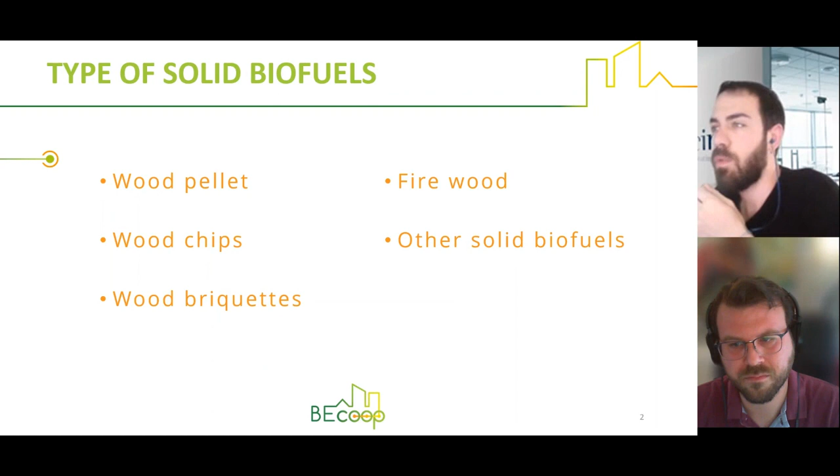So we're going to speak about the most common biofuels, mainly based on wood: wood pellets, chips, briquettes, firewood or logs, and finally we will give some information about other solid biofuels.

First, we have wood pellets, which are the most elaborated biofuel. These are small cylinders from 6 to 8 millimeters in diameter and 10 to 40 millimeters in length, obtained by pressing wood sawdust. Thanks to lignin, a natural component of wood that acts as a glue in forming the pellet, it is possible to form these small cylinders without using any other additives.

The main advantages of wood pellets are shown here. They have a high calorific value because they are compressed wood, they are homogeneous with a constant composition, which allows very high energy yields. They have minimum ash content, which reduces operation and maintenance needs of stoves and boilers.

They have easy supply in bags or in bulk, and competitive prices, especially compared with fossil fuels. We can also find quality guarantees since 85% of manufactured pellets have certifications such as ENPlus, DINPlus, or the ISO 17225-2 standard.

It is also a biofuel with a lot of presence in Europe, and the equipment that uses it is numerous, very varied, and cheap. Its main disadvantage is that compared to other biofuels, like wood chips or nutshells, the price of pellets is a bit higher. In 2018, the price of pellets supplied to houses by tank truck was 240 euros per ton.

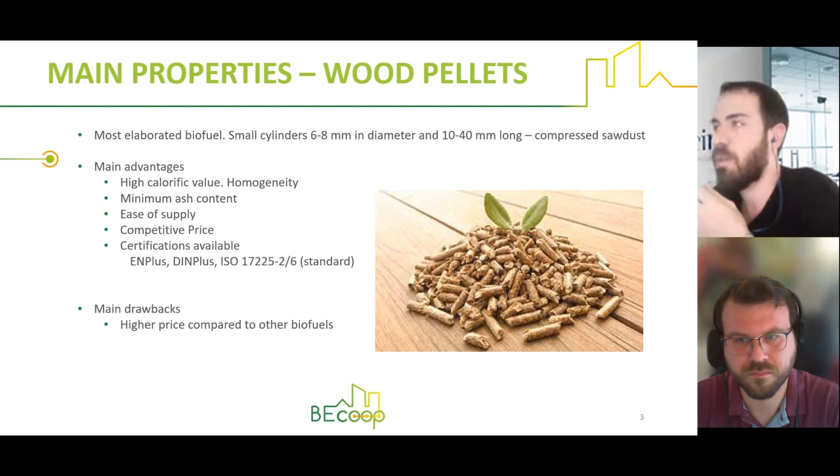Moving on, we are going to see wood chips. These are a product resulting from the crushing of biomass of woody origin, coming mainly from wood industries such as sawmills, carpentry, forest cleaning, or prunings. They have a variable size depending on the degree of crushing, and simple processing through drying and classification increases their energetic value.

Their main advantage is that compared to other fuels, they are the cheapest in terms of energy, especially compared to other woody biofuels. In 2018, the average price of chips for domestic use was about 108 euros per ton, so less than half the price of pellets.

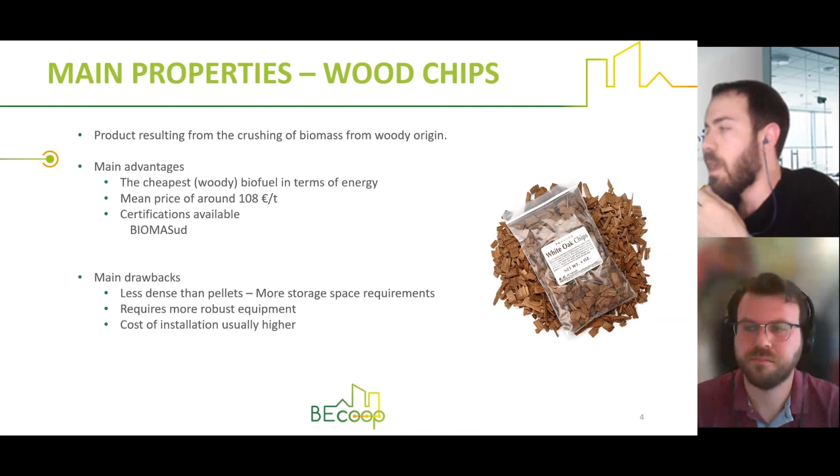Currently, the main supply companies offer chips with a certificate called Biomasud, which also guarantees standardization. But they have some disadvantages too: compared to other biofuels, they are less dense than pellets, so they require more storage space. They also require more robust equipment because they usually have higher ash content, and the cost of installation is usually higher.

Then we have biomass briquettes, a type of solid fuel made by compacting biomass materials such as crop residues, agricultural waste, forestry residues, or agro-industrial residues. They are compressed into a dense, high-energy, and easily ignitable fuel source. The biomass materials are typically first dried and then mechanically compressed under high pressure without using any binding agents or chemicals.

So in essence, they are more or less the same as pellets but with bigger dimensions, having cylindrical or rectangular shapes. They can be used as a renewable and sustainable alternative to traditional fossil fuels, for example substituting coal or other types of wood. Their main advantages are good thermal calorific value and being easy to store, handle, and transport, properties shared with pellets. They also have consistent combustion and ignition temperatures, and since they have been dried, they have lower moisture, which implies high burning efficiency.

They also don't generate smoke, soot, or carbon deposits as they are free from ashes. The main drawback is that the densification process is energy demanding, but less than pelletization. They have a higher cost than other biofuels, and they require large and waterproof space requirements. They are also affected by atmospheric conditions, for example, humidity.

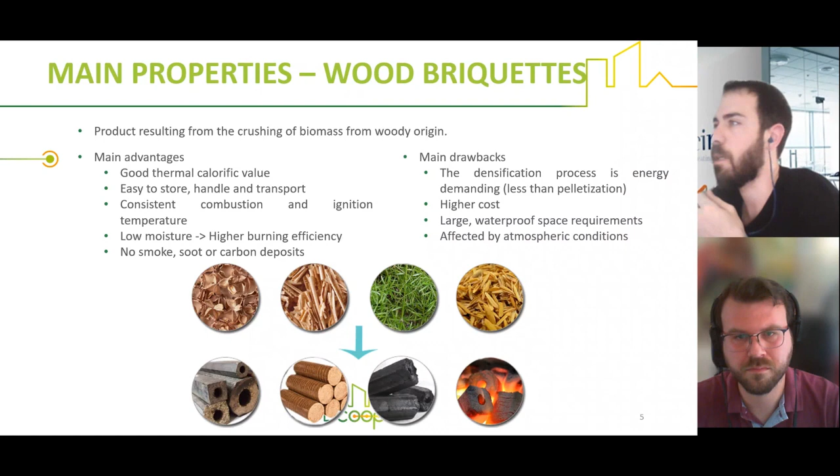In the case of firewood, this refers to logs or pieces of wood that are typically used for burning in fireplaces, wood stoves, or outdoor fires, which are the most typical source of biofuels that we can find. Most of us will have seen them in a lot of places. They are usually cut from trees, in their most natural state without any additional processing or shaping. So they are the least developed and controlled biofuel.

Although its use is in decline, the high number of chimneys in independent homes that are not very efficient means that these traditional biofuels continue to be widely used. Their main advantage is that they're widely available, because firewood is available in many regions, making it easily accessible for use as a biofuel. It's also cost effective because it can often be less expensive than other forms of biomass like pellets or briquettes, making them a good option for heating and cooking.

But the drawback is that it can also present a huge price variability. And they don't have very high processing requirements, because they require minimal processing compared to other types of solid biofuels.

Compared with other biofuels, it has some drawbacks. For example, they are not so homogeneous, and thus this does not allow automatic combustion and generates greater emission of particles and ashes. They have higher emissions because of this higher quantity of ashes. They also have greater complications of storage, and lower energy density compared to pellets and briquettes because they have not been densified. They have high price variability, as I've said before, and high difficulty in the automation of combustion systems.

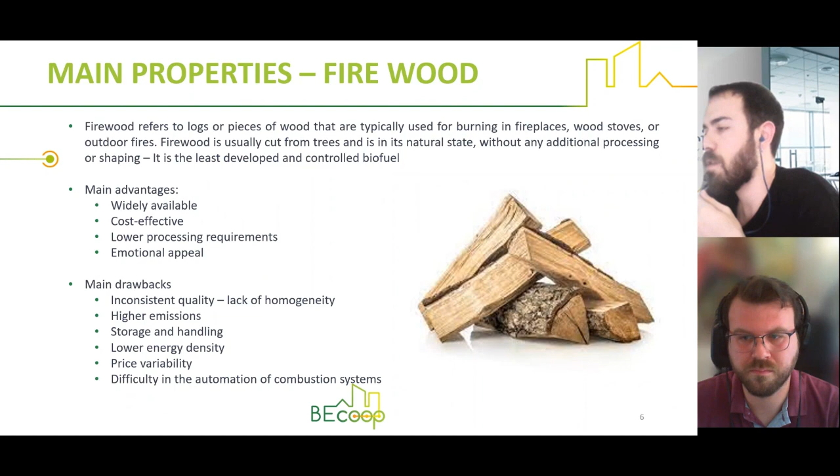Finally, we're going to see some other solid biofuels that are not as common as these forest residues. For example, we can find some agricultural residues such as straw, corn stover, rice husks, or sugarcane bagasse, that are typically lightweight and have low energy density compared to wood. They may require additional processing, such as grinding or densification, to convert them into briquettes or pellets in some cases, and they may also have higher ash content and lower calorific value compared to wood.

In the case of olive stones, they are typically dense and hard with low moisture content, and they have moderate to high energy density and also low ash content. They can be processed into briquettes or pellets with high calorific values, but their most typical exploitation form is in their natural way. Only in some cases are they dried.

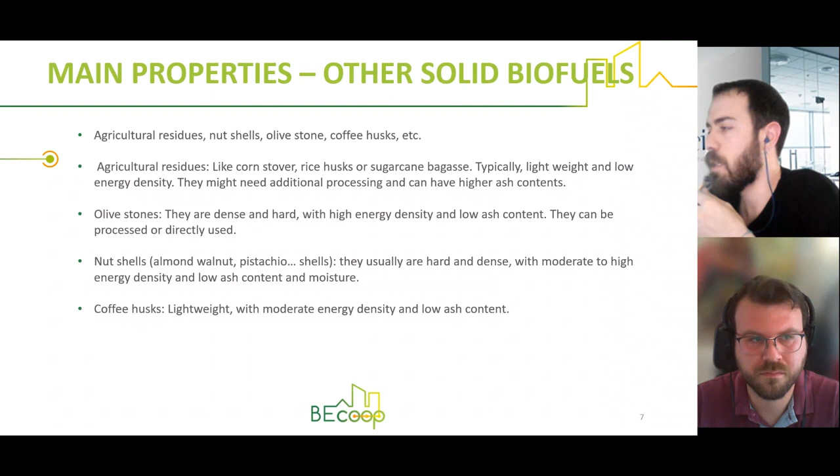We can also find nutshells that are typically also hard and dense with high energy density and low ash content. And finally, we can find coffee husks, which are typically also lightweight and available as byproducts of coffee production, which, as coffee production is so extended, makes a very big advantage for the availability of this biomass.

So this is all from my side. Thank you very much, and I hope that has been interesting. And of course, I remain at your disposal if you should have any doubt or question on whatever.

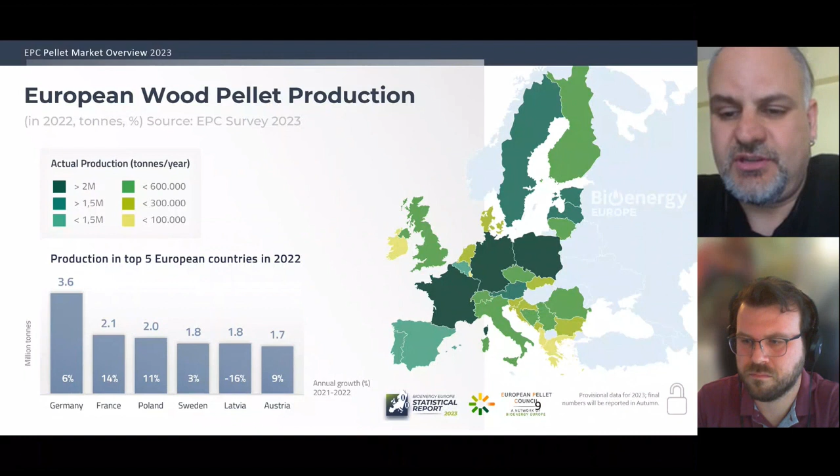But if you look at the map in more detail, you will see that pellet production basically takes place in most of the European countries, and pellet production in Europe is very much closely related to the wood processing industry, because primarily European pellet mills are using sawmilling and other wood processing residues for pellet production. So long story short, you can find a pellet producer most likely very close to where you're living in Europe.

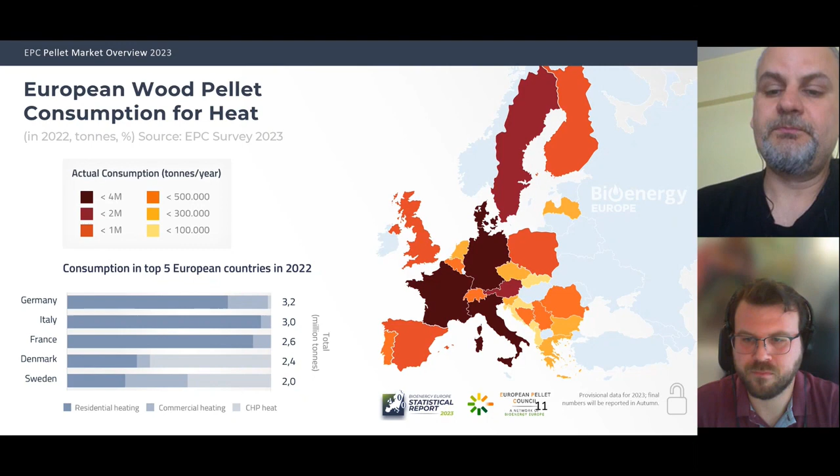But I mentioned several times the residential sector, and I imagine that several people in this webinar with us are representing energy communities, or aspiring energy communities, might be a better term. And most likely, these people will likely cater, if they establish a pellet activity, like ASEC did in the past, to the residential markets or small-scale commercial markets.

And therefore, in those market segments, consumption is very much related to the level of pellet appliances. You need a pellet appliance, either a stove or a boiler, to use pellets. Stoves are obviously used for room heating. They are more small scale and used in narrower spaces.

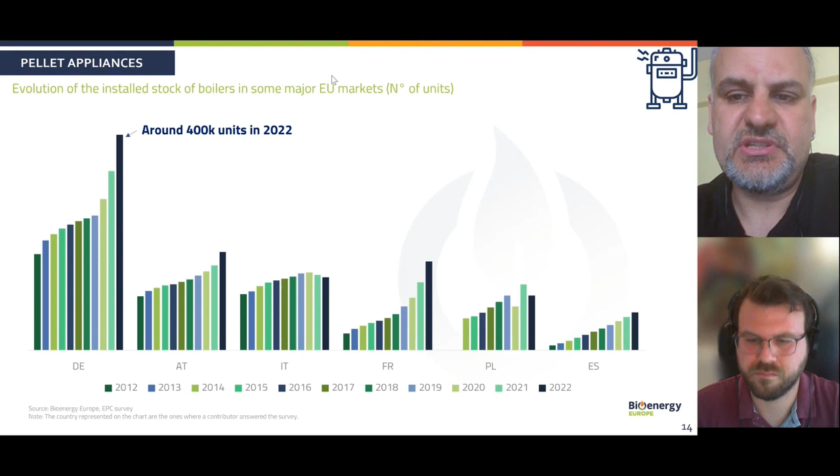Usually this is also driven by government incentives, programs that have allowed households or other end users to substitute their fossil fuel boilers with a pellet appliance. Obviously this is a big stimulus for the development of the residential pellet market in Europe.

But in the last two years, we've had an energy crisis, which has also been reflected in the pellet markets.

It took the war in Ukraine and a conflict that escalated into a wider financial and energy crisis to turn the tables. Since last year, from spring, with a peak in summer and early autumn months, we've seen unprecedented levels of pellet prices in Europe, in almost all member states. Since the peak, prices have started to go down, but they still remain at higher levels than historical values, and we're often asked why this is so.

There is not one simple answer. There are multiple reasons. One is that in the past, Russia was - and still is, I guess - a big pellet producer, mostly an exporting country. With the EU sanctions, imports of Russian pellets into Europe were no longer feasible, so there were some supply deficits last year.

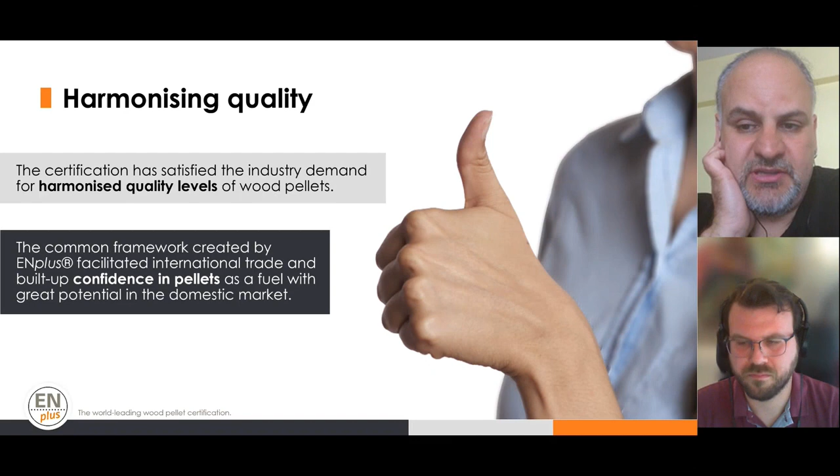So what does EN Plus try to do? It tries to harmonize essentially the quality levels of wood pellets. It's a fuel quality certification scheme, and the aim of such a scheme is to build up confidence in pellets as a fuel. Basically, at the end of the day, consumers should know that when they buy EN Plus pellets, they buy a product of specific quality parameters that they can use in their appliances without issues.

EN Plus is a third-party certification scheme, and maybe a short clarification here: a standard and a certification scheme are not the same thing. A standard is a document that provides some guidelines. A certification scheme, especially a third-party one, is a system that uses the standards but applies procedures to ensure they are followed by people in the value chain.

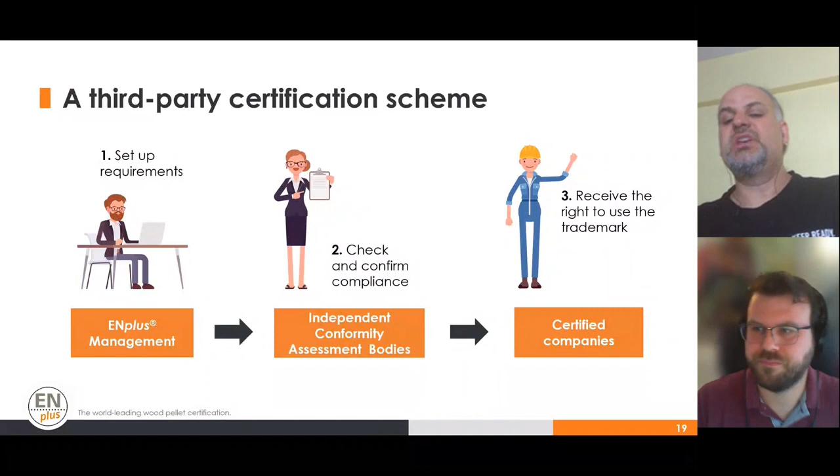So how does it work in practice? We have the management of the system, the central office of EN Plus, the European Pellet Council, that sets up the requirements for the system. Then we have independent conformity assessment bodies, as we call them, that visit the people involved in the wood pellet value chain and check that they comply with the requirements. Then you have the certified companies that, if they pass the tests and audits of the conformity assessment bodies, are allowed to use the EN Plus trademark.

EN Plus is a system that covers the entire supply chain, so you can have producers of wood pellets certified with EN Plus, traders of wood pellets certified, but also service providers. In some market segments this may be a more familiar picture; in others, like Greece, it might not be. A service provider could be, for example, someone delivering bulk pellets, EN Plus certified, to an end consumer via truck. In Greece and other markets it's mostly bagged pellets, so this may not be so familiar.

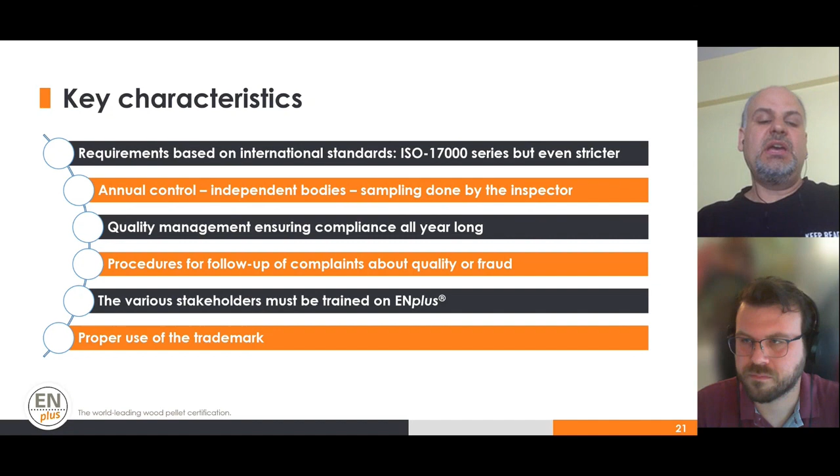Some key characteristics of the system: it's based on ISO standards, but some requirements are even stricter. There is an annual control of certified companies by independent bodies, including sampling done by inspectors. There is a quality management system that companies should use throughout the year to ensure compliance. There are procedures to handle complaints about quality or fraud cases, people illegally and improperly using the EN Plus trademark. People involved in any part of the certification scheme, like producers, quality managers, and the conformity bodies, need to be trained. And there are requirements about the proper use of the trademark.

I don't know if I need to go into a lot of detail about the history, but the scheme has already several years of operation. It was established in Germany in 2010. Now it's managed by the European Pellet Council, with local management in some countries by what we call national licensors. In other countries we have national promoting associations who are only active in promoting the scheme, while the management is done by the central office in Brussels. The conformity assessment bodies are people active in certification, inspection, or testing of pellet samples, for example.

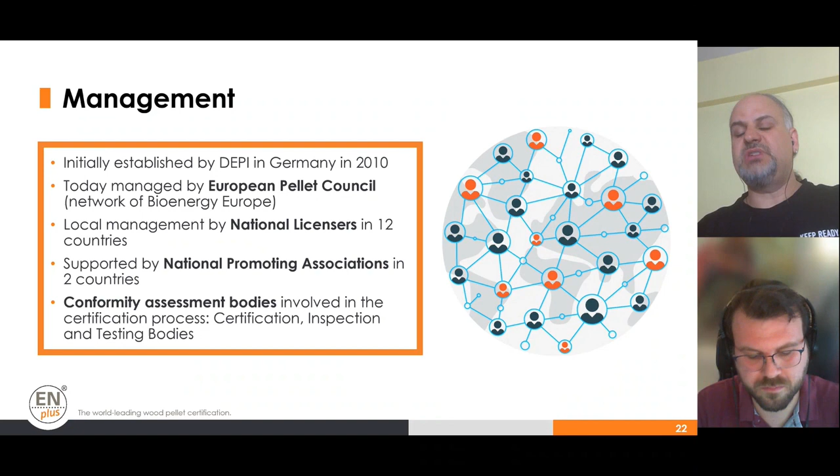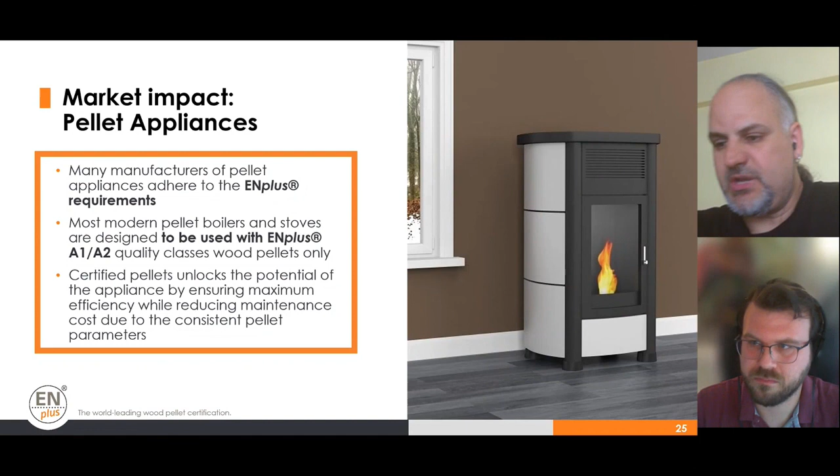Final note: as I said, several of you are or might be in the future energy communities that want to expand in the pellet market. A good question would be, why would we go for an EN Plus scheme? At the end of the day, consumers will most likely, in many markets in Europe, ask for such a scheme. But also, if you're planning to do business with institutional end users, such as municipalities or hospitals, it might be the case that procurement contracts will require a fuel quality certification scheme in place, because these end users will invest in a boiler system, and that boiler system will need fuel certified in quality to operate properly and keep all the guarantees the manufacturer is providing.

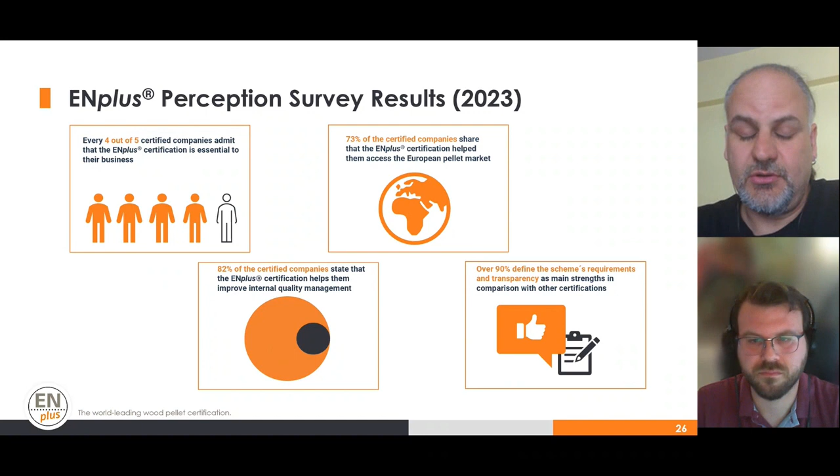So I think that's all from my side. Open to any questions you may have, either online or in the chat.

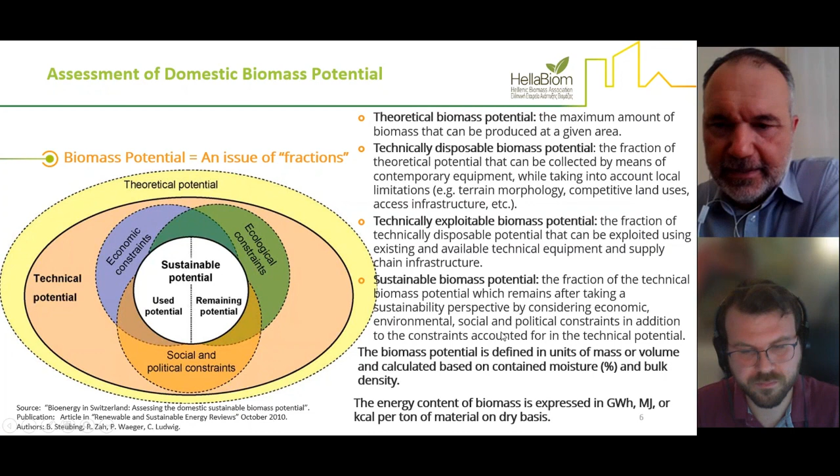And finally, at the heart of the model, the sustainable potential is what remains after taking a sustainability perspective and considering economic, environmental, social, and political constraints. This depends, of course, from country to country, and internally within a country, and also on different activities and the different seasonality in which these activities take place.

We can have a look at the assessment of different sectors, starting with the agricultural sector. The theoretical potential is about 8.7 million tons of dry matter per year, while the technically disposable potential is about 5.5 million tons, which corresponds to about 28 terawatt hours per year. The main agricultural biomass residues are cotton residues with 1.3 million tons per year, straw at 1.1, and olive tree pruning at about 1 million tons per year, plus residues from other agricultural cultivations.

The technically exploitable biomass potential is estimated to be around 1.5 million tons for crop residues. For orchard tree pruning it depends - there is a range from 1.5 to 2.5 million tons, so from 3 to 4 million altogether, which corresponds to 1 billion liters of oil equivalent. So this is really a good quantity that can be mobilized.

But of course there are many challenges which result from insufficient agricultural waste management, which still takes place mostly nowadays through open burning and landfilling. The challenges include hazardous practices leading to the outbreak of wildfires and degradation of air quality, which has devastating consequences for human health and life. There is also emission of greenhouse gases into the atmosphere - methane emission due to the decay of organic matter, but also carbon dioxide emission due to open air burning.

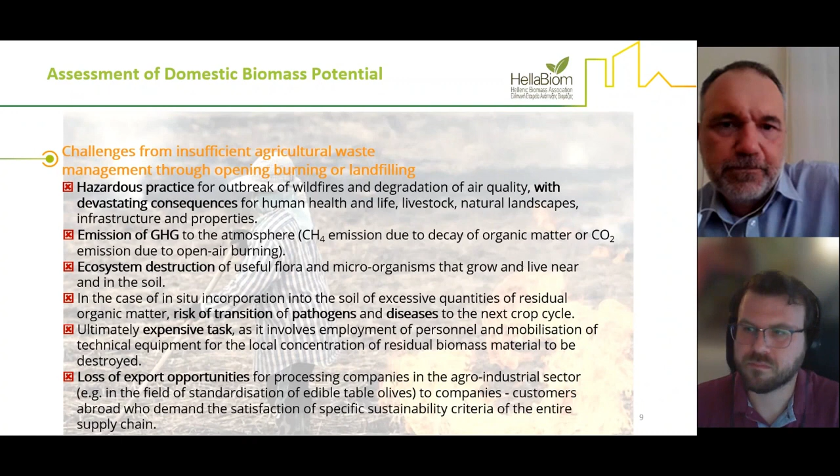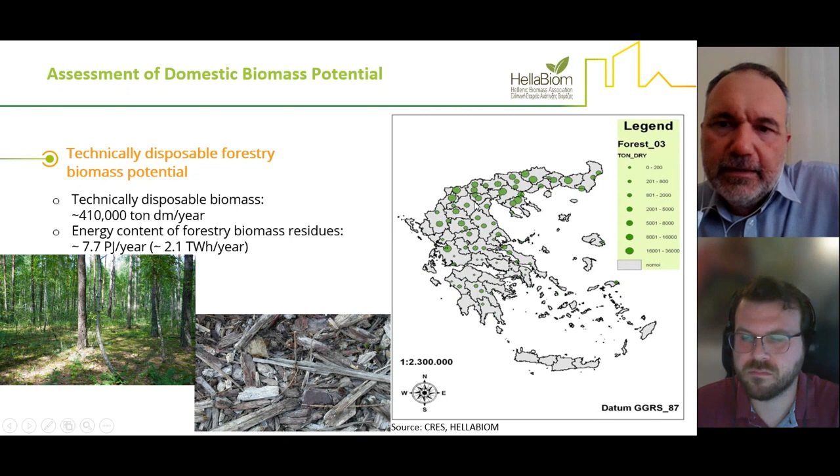Talking about forestry biomass potential, the estimation is a dry matter of about 400,000 tons per year, with an energy content of 2.1 terawatt hours per year. It is concentrated mostly in the northern part of Greece, Central Macedonia and Thrace. And again, here there are still challenges.

These challenges result from insufficient waste management in forests and urban groves - again the risk of large-scale wildfires, which unfortunately we have seen in recent years in Greece due to lack of sustainable forestry management. There is release of methane, a potent greenhouse gas, due to the decay of woody organic matter in the forest. Another challenge is the lack of incentives for the local workforce involved in forestry, resulting in aging of logging populations and rural abandonment.

And also there's a loss of opportunities if there's no sustainable forestry management to transform the forest into a modern biorefinery that would meet the needs of modern circular bioeconomy at all levels - in sawwood for construction, in pulp for the pulp industry, bioplastic fibers, bioadhesives, bioenergy, and biofuels.

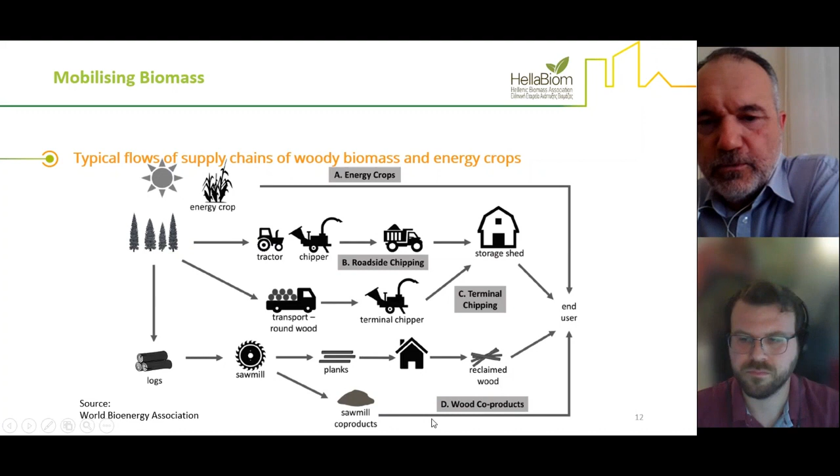In order to mobilize these fractions and bring them to the end user, the typical flows of supply chains of woody biomass and energy crops in the agricultural sector can come either through energy crops in the forestry sector, through short rotation coppice energy crops which can be moved directly to the end user or pre-processed in the field by chippers. Or, for roundwood logs, they can be transported to a terminal chipper, stored temporarily, and then moved to the end user. We also have byproducts of the woodworking industry and sawmills, which produce useful products for construction and byproducts for bioenergy and pellet production.

In the agricultural sector, there is a combination of different machinery that can be used according to the initial plantation and the type of agricultural residue. These residues can be either temporarily stored or directly transported to the end user, or stored to cope with seasonality problems. This can be done, for example with straw, by baling it, or with modern machinery in the field that shreds and pelletizes it for storage closer to the end user.

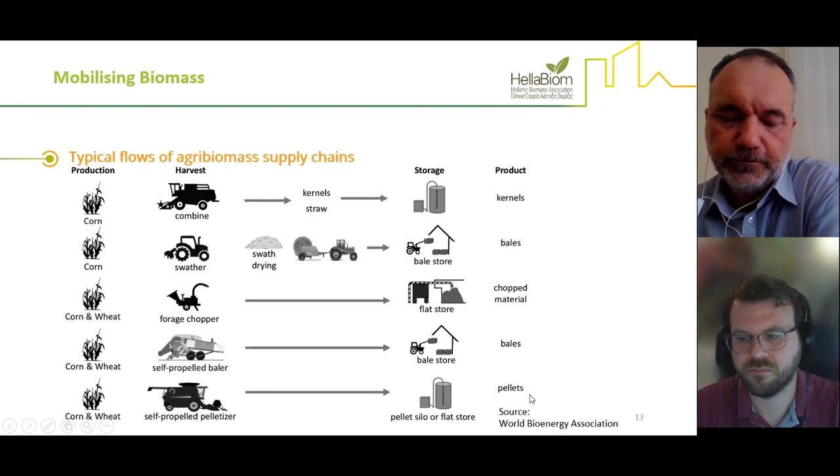We are going now to look at two examples, one in the forestry sector and one in the agricultural sector, about valorization of biomass waste streams.

One example is about the environmental problem of tree branches coming in close proximity to electrical power lines, both in rural and urban areas. As we know, when a tree branch touches a power line, the tree becomes electrified, and current passes through the tree's tissues into the ground. The consequences can be devastating for human life and property, and this problem has to be tackled.

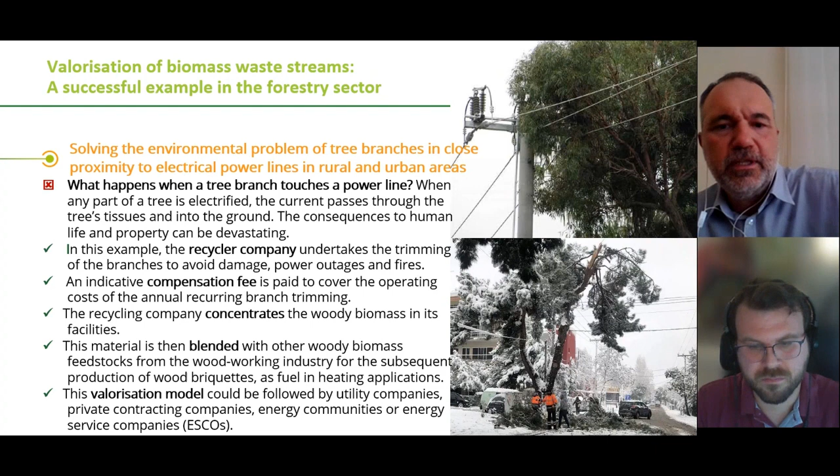In this particular example, the recycler company undertakes the trimming of the branches to avoid damage, acting proactively. It has a compensation fee that is paid to cover these operating costs, done on an annual recurring basis. The recycling company concentrates the woody biomass in its facilities. This material is blended with other woody biomass feedstocks coming from the woodworking industry, and eventually transformed and produced into wood briquettes. This valorization model could be followed by utility companies, private contracting companies, energy communities, or energy service companies, ESCOs.

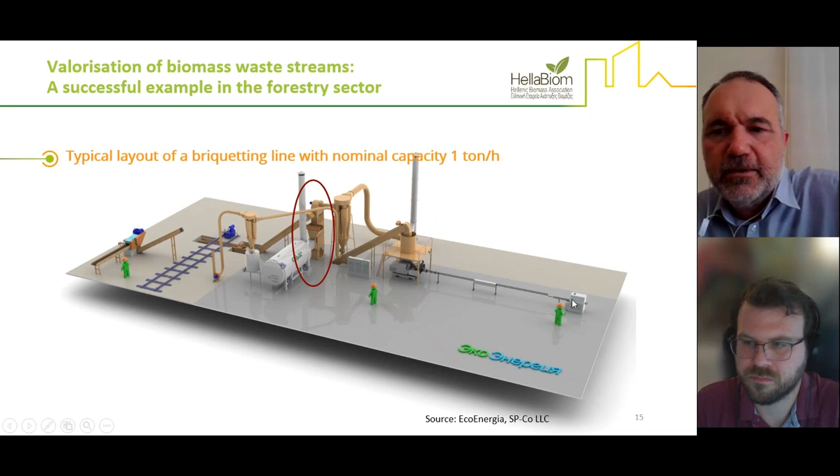A typical layout of a briquetting line with this process in place is that it can receive the shredded material either through a moving floor or by truck, and then this is forwarded to a combined milling and drying unit, which reduces the size and achieves the required humidity for subsequent briquetting. Then it passes through a briquetting press, which can take different shapes and section profiles. After the cooling line, it is cut to the desired sizes, and it's packaged and stored.

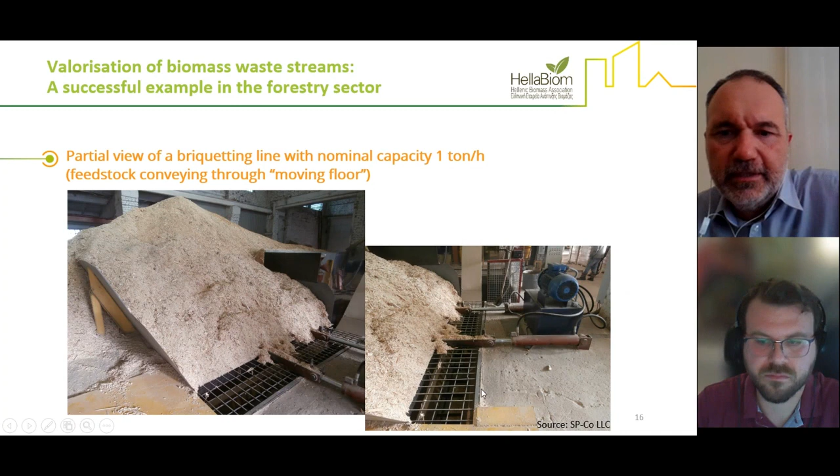Some photos of this installation. This is a partial view of the moving floor, where the trim material is being loaded. Then it is moved to the combined milling and drying process, where the principle is that on one inlet is the hot air coming from the heat generator, and on the other inlet is the feedstock. The principle here for the operation to take place in the same chamber is simple.

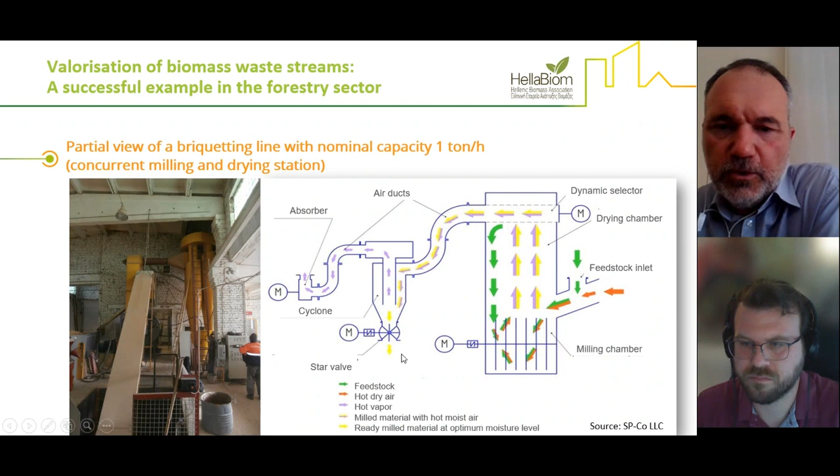It relates to the fact that once a particle is smaller in size, it can be more easily dried, and if it's drier, then it can be more easily milled. So this process is continuous, and once a dynamic selector on top sees that the humidity is ideal and the granularity is the one desired for downstream activities, the material passes through a cyclone and is received at the bottom of this station.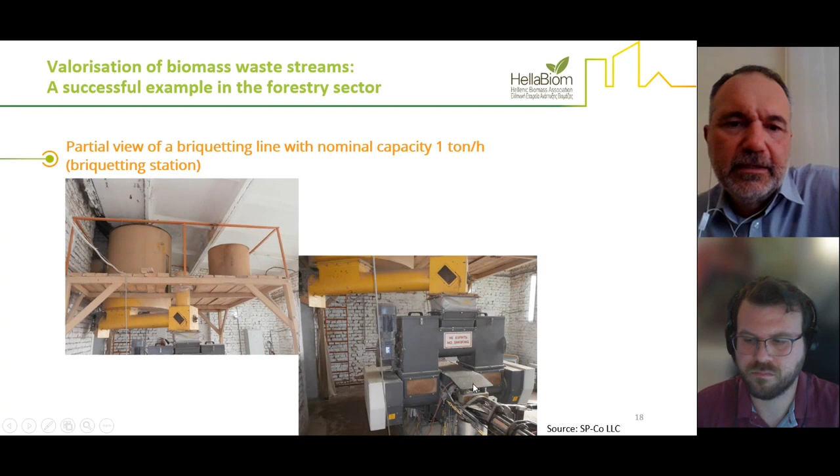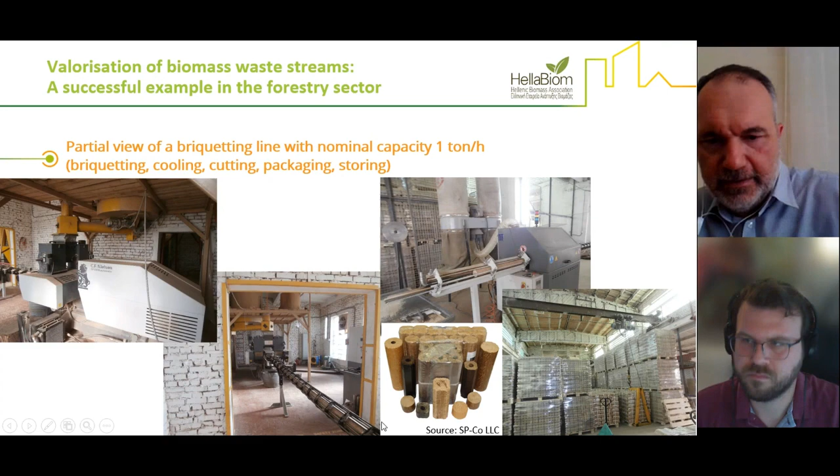Afterwards, it is moved to a temporary silo on top of the briquetting line. There's also a second silo sometimes when we wish to give a better binding quality to the material, usually consisting of lignin. The material, at a humidity of 10%, passes through the briquetting press. After the briquetting line, it comes out in a compact form of briquette, but it can also have a hollow in the middle, depending on what is the desired air circulation during combustion.

A second example comes from the agricultural sector, a successful case. Here we have a very common situation where vineyard residues are left in the fields and burnt for destruction. Although this practice is banned from spring to summer, we still see it in the Greek countryside and in other countries, especially in the Mediterranean zone. Hazardous fumes are released to the atmosphere, which is also a problem for health.

In this example, the vineyard operator company undertakes the baling and collection in the vineyard, and transports the bales to a nearby sorting and post-processing facility. The purpose is to produce a secondary product which would complement and add value to wine and food tasting, and recreational barbecue activities and markets.

The valorization model could be replicated by vineyard operators who have access to vineyard pruning collection machinery in close proximity to their plantations. It can also be undertaken by agricultural cooperatives as well.

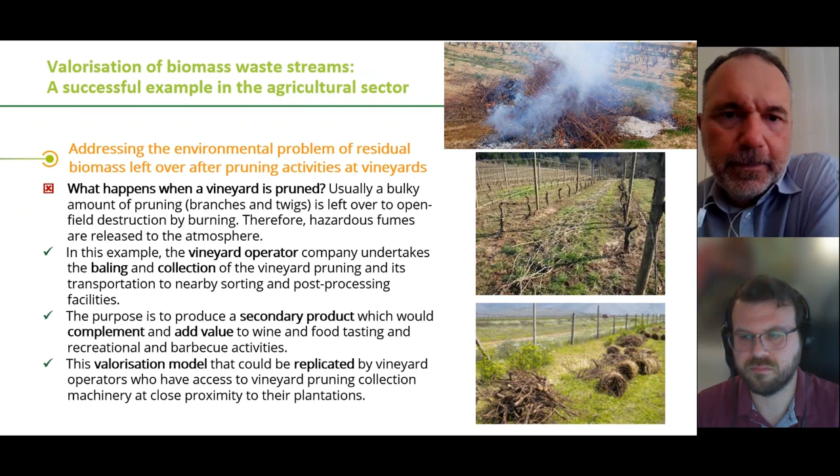The preparation of feedstock for valorization through briquetting technology comes through appropriate machinery which goes into the field. It collects the vineyard residues into bales. Then there is a bale chipper, either mobile in the field or stationary nearby, used to shred the pruning to a particle size of maximum 15 by 5 by 2 millimeters, which is the ideal size to be forwarded to the briquetting presses.

The moisture content should be around 10%, but usually this feedstock is very dry, and sometimes water needs to be added during the briquetting process instead.

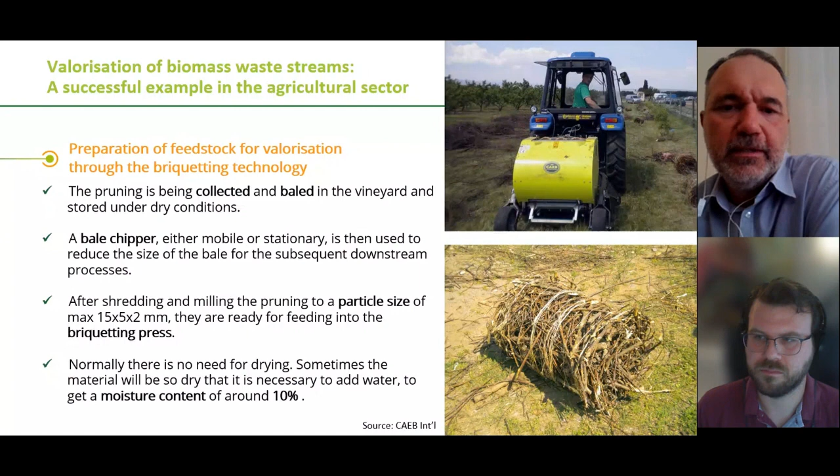For the briquetting operation, the milled pre-processed material is stored into a standard dosing silo, shown in the picture here. The silo feeds one of the briquetting presses for production of briquettes. Usually the diameter is 90 millimeters, with a hole, or without a hole, of 20 millimeters. The standard capacity for a cost-effective investment is from 1,100 to 1,500 kilos per hour.

Briquettes are produced in a continuous string and conveyed to an automatic saw or briquette breaker. Then there is a long cooling line, about 30 meters. It is very important to allow the briquette string to cool down and harden enough in order to be handled later for shortening and packaging.

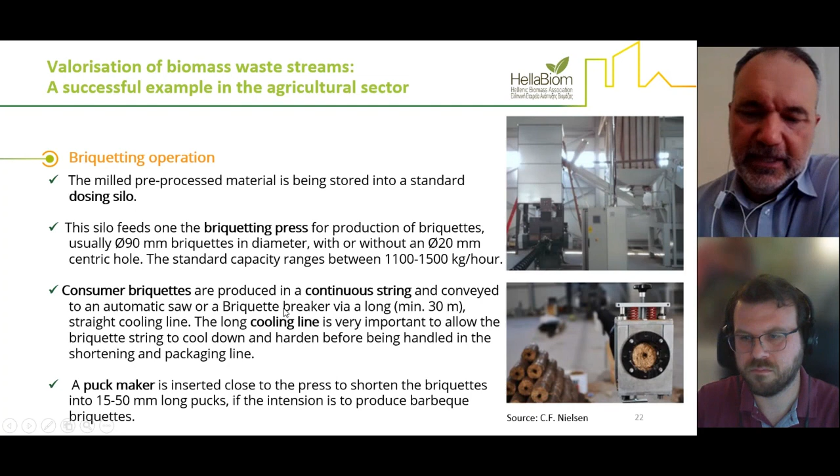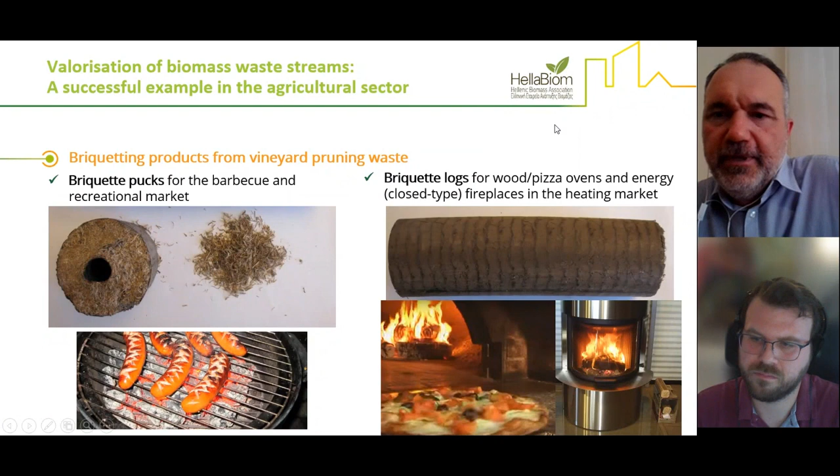There is also material that can be transformed into a puck instead of a briquette. These are smaller briquettes with a length of 15 to 50 millimeters. So there could be two different kinds of products: on the left-hand side, briquette pucks for the barbecue and recreational markets, as a replacement for charcoal; and on the right-hand side, briquette logs for wood and pizza ovens, and also closed-type energy fireplaces for better efficiency.

In this successful case, the vineyard operator and wine producer can expand its business opportunities while informing consumer markets about the biocircularity of the whole production process.

By concluding the presentation, we must say that sustainable valorization of biomass waste streams obviously goes hand in hand with viable socioeconomic models. Considering the biomass fractions, logistic costs, and end product service value, this is often a complex and tedious exercise. While determining the value of the end-use application, it is essential to decide whether or not to embark on the biomass valorization project.

But it is also essential to take into account the cost of not handling the waste. Usually we neglect to see that there is no zero-cost solution. So unless the residual biomass has a value like a gate fee, the investment could not pay off, and it is difficult to pay off.

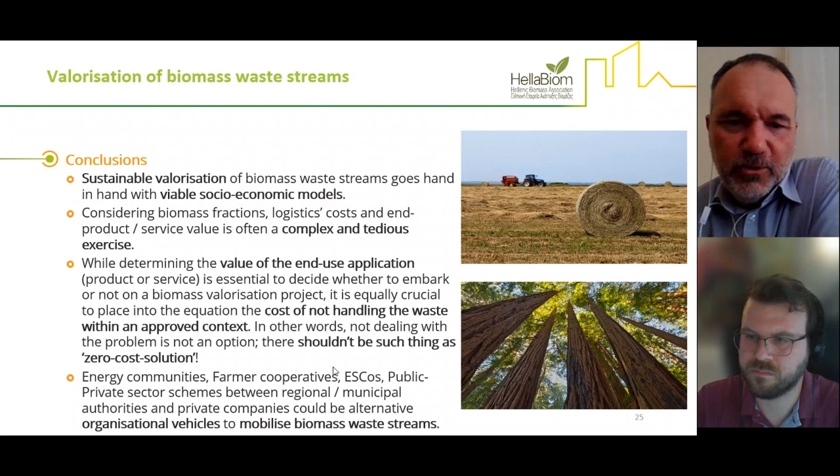I would be happy to answer any questions. Thank you very much for your attention.

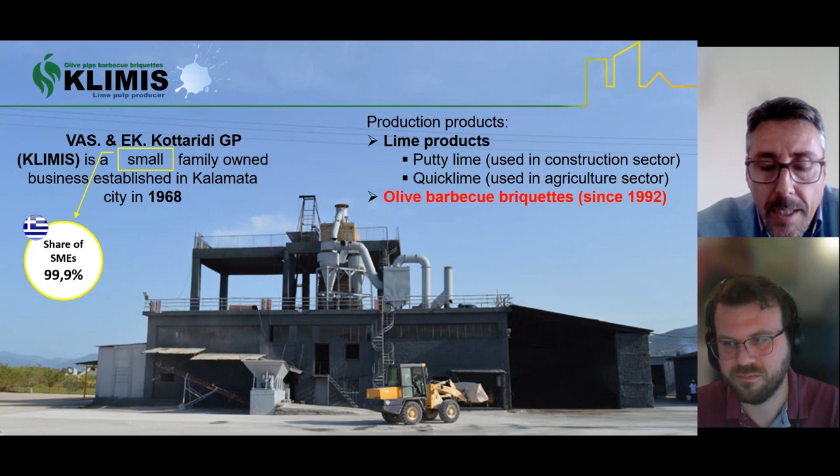Klimis Company is a small family-owned business established in Kalamata in 1968. Keep in mind that 99.9% of Greek enterprises are SMEs. We produce lime products separated into two categories: quick lime, used as a powder fertilizer in agriculture, and putty lime, used as a building material in construction. Since 1992, more than 30 years now, we have produced and distributed in the market an innovative product for barbecue, the Klimis olive barbecue briquettes, which is successfully replacing wood charcoal.

Before we go into further details about the way we produce these products, I want to present some scientific data about wood charcoal from a foresight brief of the United Nations Environment Programme from 2022, titled "Charcoal as a Global Commodity: Is it Sustainable?" Charcoal is typically made from trees, is perceived to be a renewable resource, and is used in both low and middle-income countries as well as high-income countries.

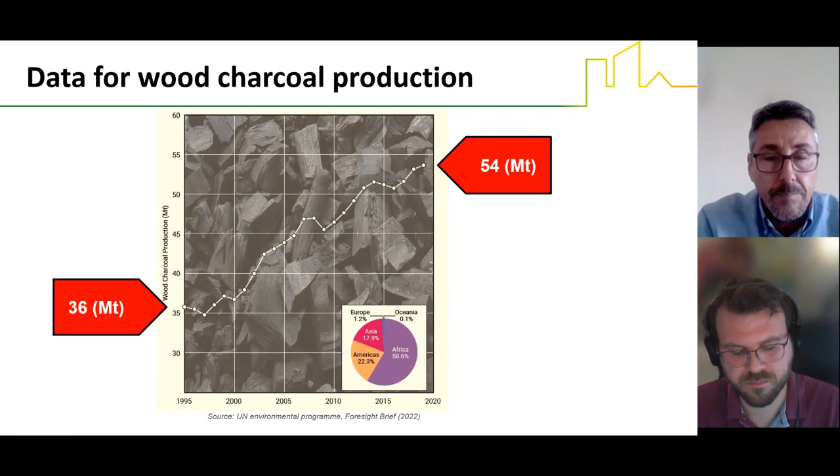As you can see on this slide, the major tropical wood charcoal producer countries are Brazil, Nigeria, Ethiopia, India, and the Democratic Republic of Congo, countries which are losing significant biodiversity and forest cover every year.

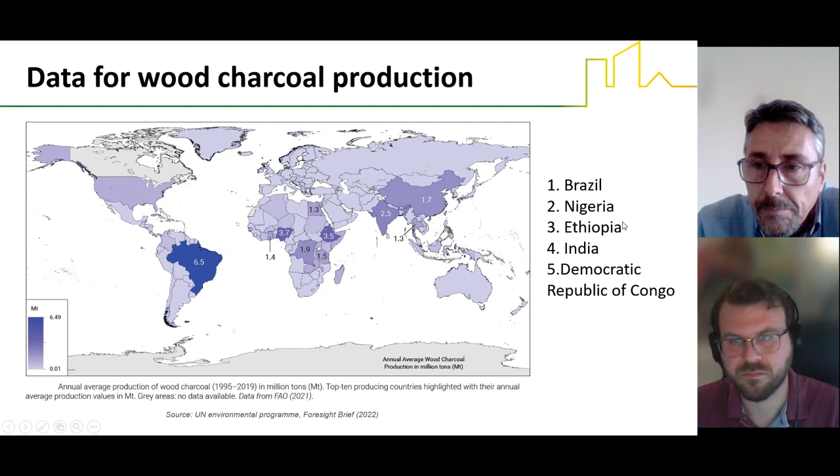According to WWF Germany, in the report titled 2020 Analysis of the EU Charcoal Market, almost 1 million tons of charcoal are consumed in the European Union each year. Only a quarter of it is produced in Europe. The remaining three-quarters, just under 750,000 tons, are imported, most of it from countries such as Ukraine, Nigeria, Russia, Indonesia, or Paraguay, where corruption, illegal logging, and forest destruction are widespread. In Europe, Germany by far is the largest importer of charcoal among EU countries.

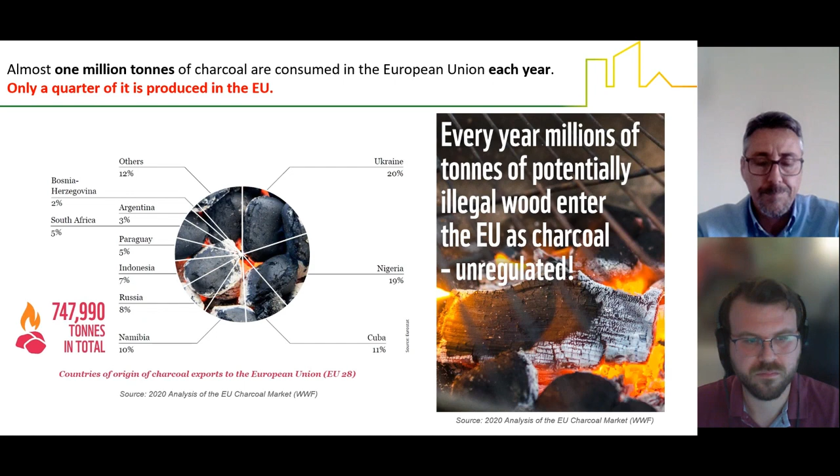According to the Food and Agriculture Organization of the United Nations, in the report titled The Charcoal Transition, an estimated 1 to 2.4 gigatons of carbon dioxide equivalent of greenhouse gases are emitted annually in the production and use of fuel wood and charcoal, which is 2% to 7% of global anthropogenic emissions. These emissions are due largely to unsustainable forest management and inefficient charcoal manufacture and wood fuel combustion.

Charcoal production in particular has risen in recent decades as demand has grown among urban population and enterprises. Where demand is high, mainly in sub-Saharan Africa, but also in Southeast Asia and South America, unsustainable wood harvesting and charcoal production contribute to forest degradation and deforestation and to greenhouse gas emissions along the charcoal value chains, especially when charcoal is produced using inefficient technologies.

In addition, deforestation and forest degradation may both cause biodiversity loss because of the reduction of habitats and their fragmentation, as well as the loss of crucial ecosystem functions. The selective extraction of woody species for charcoal production may also lead to changes in species composition in forests and woodlands with undesirable ecological consequences.

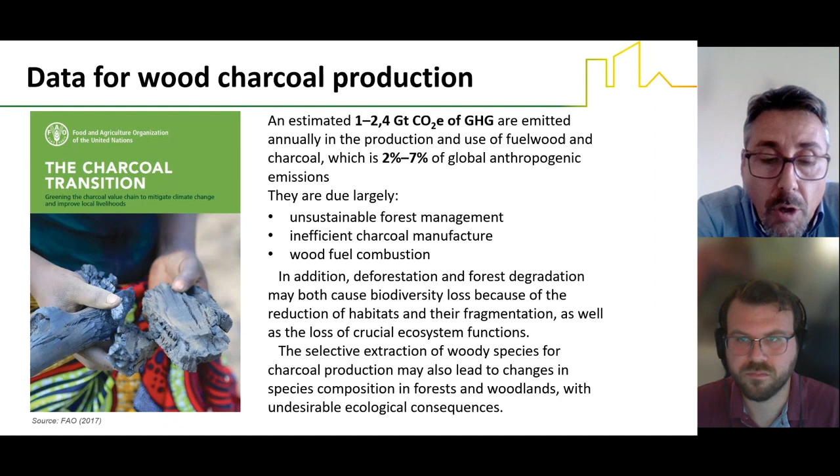There is a conclusion coming from the foresight brief of United Nations on 2022, which says innovation and policies aimed at producing charcoal from organic waste materials are urgently required to prevent further forest degradation and loss of biodiversity, and to increase the sustainability of this material. And this is what we do in practice for more than 30 years here in Kalamata. Let's see how.

To produce our products, we use limestone. Limestone is a type of sedimentary rock with a high percentage of calcium carbonate. Limestone has many usages in real-life applications by its own. Many structures have been carved out of limestone, and many buildings have been built with limestone. Some examples are the Empire State Building in New York, in the United States of America, and Houses of Parliament in London. If we go further back in time, the external structure of the Great Pyramid of Giza in Egypt is made of limestone, as are the walls of Machu Picchu in Peru. This shows that the usage of limestone as a building material is not a recent innovation.

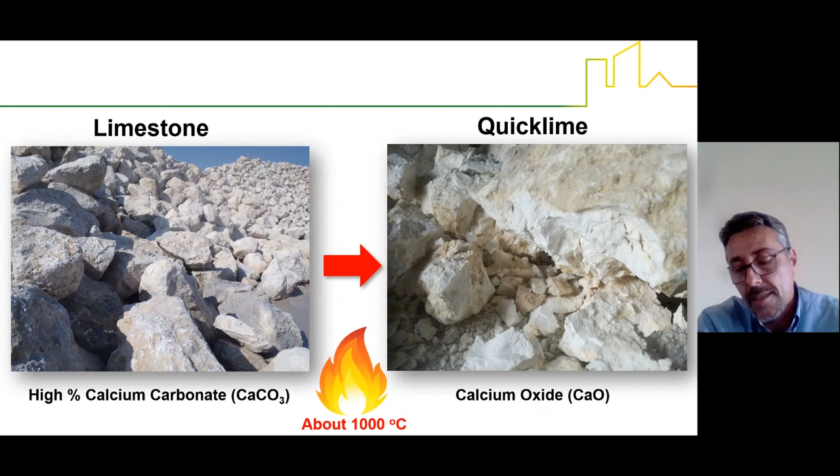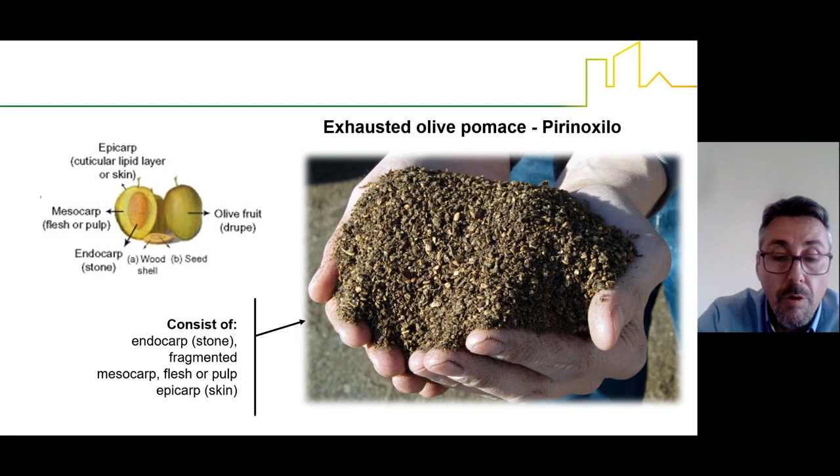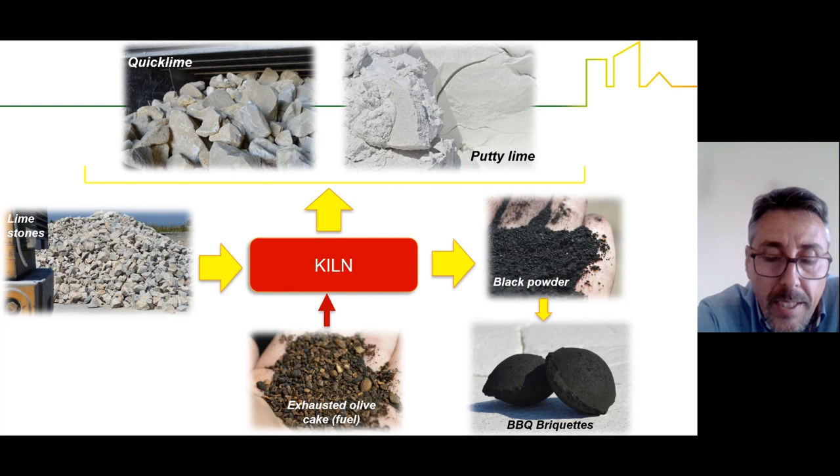In this slide, you can have an optical view of our production process. On your left hand, you can see the limestones coming from quarries, and we put them in the kiln. We bake them by using the exhausted olive cake, and on the top of the slide, you can see our main production products, quicklime and putty lime. But due to the incomplete combustion of the exhausted olive cake, we collect the black powder that you can see on the right part of the slide, and we create our barbecue briquettes with unique advantages when used.

Big calorific power, easy to light up, no creation of smoke, sparkles and bad smell, and emits 30% less carbon monoxide during combustion than wood charcoal. Last but not least, the ash which is created by the usage of our briquettes contains nutrients like nitrogen, potassium, sodium, copper, manganese, and boron, which exist in typical fertilizers. So it can be applied to soils or to plant tissues to supply one or more plant nutrients essential to the growth of plants.

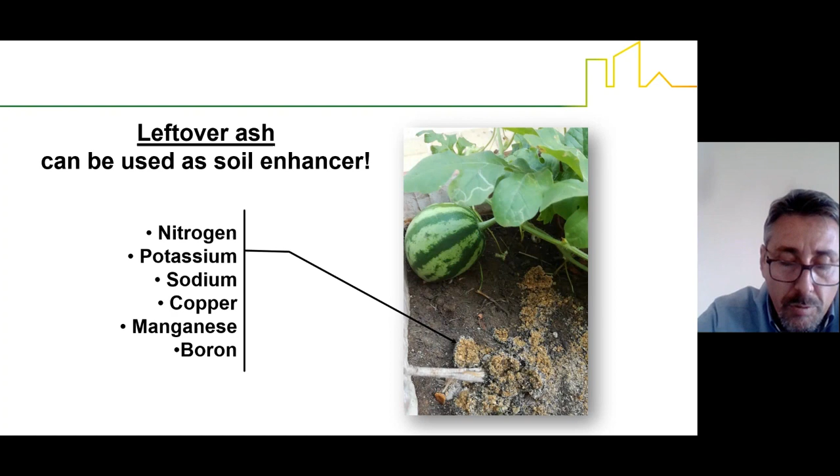As a certified company with ISO 9001 and ISO 14001, we carefully monitor the quality of our production process at each stage to ensure compliance with our quality standards.

Not only do we sell our product, but it meets high standards in countries like Germany and Sweden. Germany is by far the largest importer of charcoal among EU countries. Germany's first eco-products testing magazine, Öko-Test, which helps consumers make the right purchase decisions with special emphasis on health and environment, and has millions of readers, rewarded our briquettes as one of 3 excellent brands in eco-friendly barbecue briquettes in July 2022, among 18 barbecue products.

Also, our partners in Sweden have been certified with the label Bra Miljöval as a Good Environmental Choice, which is the only label in Sweden run by an environmental organization.

For 10 years, we were members of the European EMAS. The initials stand for Eco Management and Audit Scheme, a premium management instrument developed by the European Commission for companies and other organizations to evaluate, report, and improve their environmental performance. The DG Environment of the European Commission rewards the excellent work of EMAS registered organizations in environmental protection by introducing the EMAS Awards.

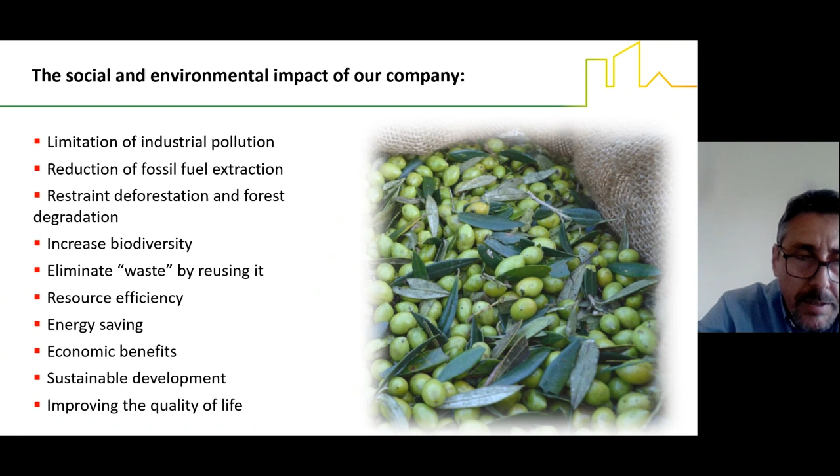In brief, our environmental and social impact includes limitation of industrial pollution, reduction of fossil fuel extraction, restraint of deforestation and forest degradation, increased biodiversity, waste elimination through reuse, resource efficiency, energy saving, economic benefits, sustainable development, and improving the quality of life.

We produce an eco-innovative certified product, awarded three times in 2009, 2014, and 2018 by the DG Environment of the European Commission for Eco-Innovation and Excellence in Environmental Performance. It has also been promoted by the European Commission and other European sites engaged in circular economy and bioeconomy.

According to United Nations reports in 2022, alternative raw materials such as agriculture and other organic waste should be used more widely to produce charcoal. But on the other hand, Europe imports annually about 75% of its wood charcoal from third countries. Every year, millions of tons of potentially illegal wood enter Europe as charcoal, unregulated.

There is limited recognition and awareness of byproducts, and a lack of promotion and motivation for such kinds of products—for instance, less effort is put into it. There is also a lack of education about circular economy, bioeconomy, and environmental management systems.

For customers, terms like circular economy, bioeconomy, ISO 14001, and EMAS are unknown words. There is no European eco-label for such products, so how will the customer recognize the environmental excellence of products on the store shelf, assuming they even know that label? And at the end—or maybe I should put it first—SMEs struggle to access finance for developing new products and supporting growth plans.

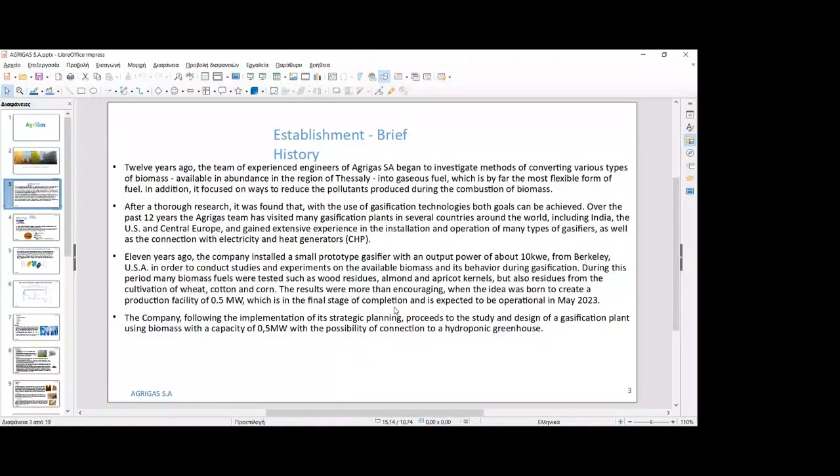Yeah, we see the third slide right now, the brief history. In 2012, the company installed a small prototype gasifier.

With output of 10 kilowatts electricity from Berkeley, USA, where an engineer of the company participated in a 3-day seminar in order to have a taste of what the gasification procedure is. During this period we tested many biomass fuels such as wood residues, almond and apricot kernels, also residues from cotton and corn cultivations here in the region of Larissa. As a result, we were encouraged to proceed to create a production facility of 0.5 megawatt, which is the final stage, expected to be in operation in May 2023.

The company, following the implementation of its strategic planning, proceeded through the study and design of a gasification plant using biomass with the capacity mentioned, and the possibility of connection to a hydroponic greenhouse. Here is a small presentation of the company, with the main target being a unit capacity of 500 kilowatts, consuming about 4,000 tons of biomass and producing about 4 gigawatt hours per year. The production capacity will be...

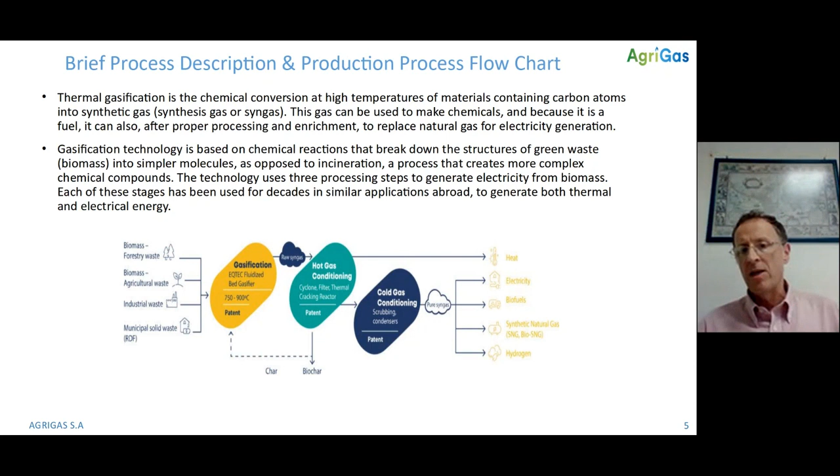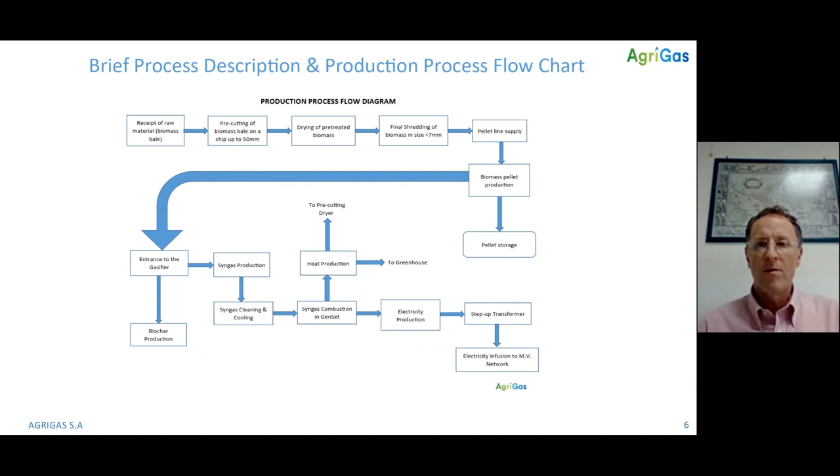The technology uses 3 processing steps to generate electricity from biomass. Each of these stages has been used for decades in similar applications abroad to generate both thermal and electrical energy. Here you can see a description of the process flow chart of Agrigas. The base products of the plant are electricity, thermal power, pellet, and biochar.

The main product in the production is electricity through gasification. The produced syngas, after being generated in the gasifier, goes through a purification and filtration process and is led to a generator for electricity generation. The electricity produced is channeled into the distribution network under a feed-in tariff of 193 euros per megawatt hour.

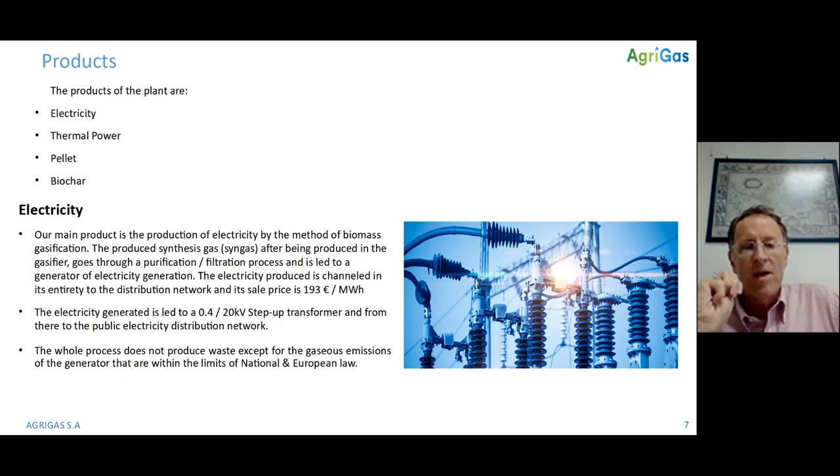After a step-up transformation, it goes to the public electricity grid. The whole process does not produce waste, except for the gaseous emissions from the generator, which are within the limits of national and European law. The thermal power produced through this procedure in the first stage is not used anywhere except for drying the biomass, if needed, in the dryer of the pellet line.

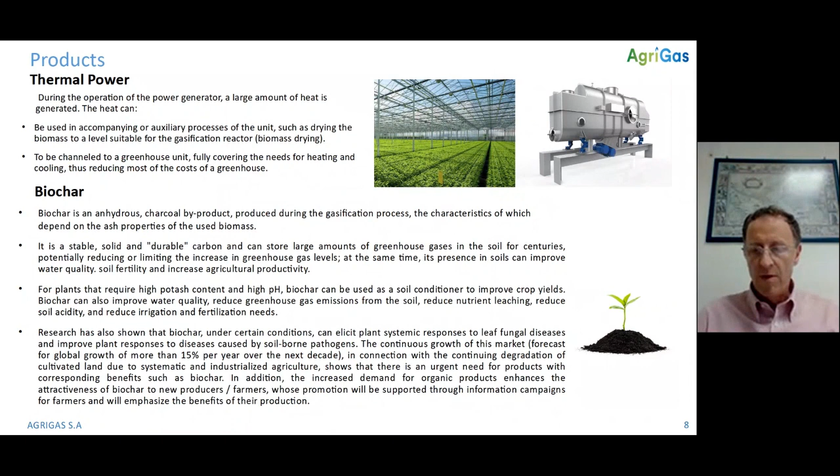Biochar is a byproduct of the whole procedure - it's what we obtain after the gasification of the biomass. In order to reduce time, I won't give any further description. If anyone would like to learn more, I'm at your disposal after the end of the presentation to answer questions.

And we go to the pellet, which is the product of our company before the gasification. The pellet is the final form of the biomass that can be used in the gasifier in order to achieve the production of syngas and respectively the electricity production.

The company produces pellets from wheat straw, barley, oats, corn, and mixtures in different proportions. Straw is the main product, with high calorific value and low moisture content. It has been used for animal feed and animal bedding, and is the most common here in our region, found from late May till early July.

The company Agrigas has all the appropriate equipment on its own for the collecting, including balers, tractors, and all the auxiliary equipment for cleaning all the fields and collecting the biomass. The competitive advantage of the technology is using a very low energy footprint.

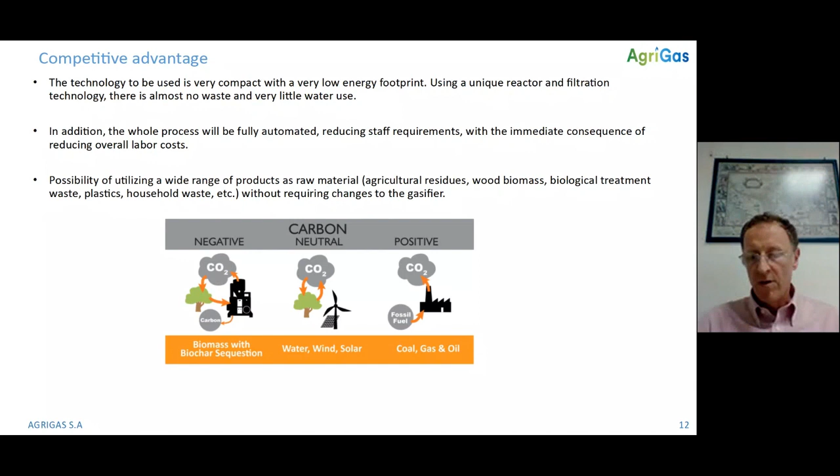There is the possibility of utilizing a wide range of raw materials: agricultural residues, wood biomass, biological treatment waste, plastic, household waste, etc., without requiring changes to the gasifier. It's an opportunity, but for the beginning we're still focusing on agricultural residues.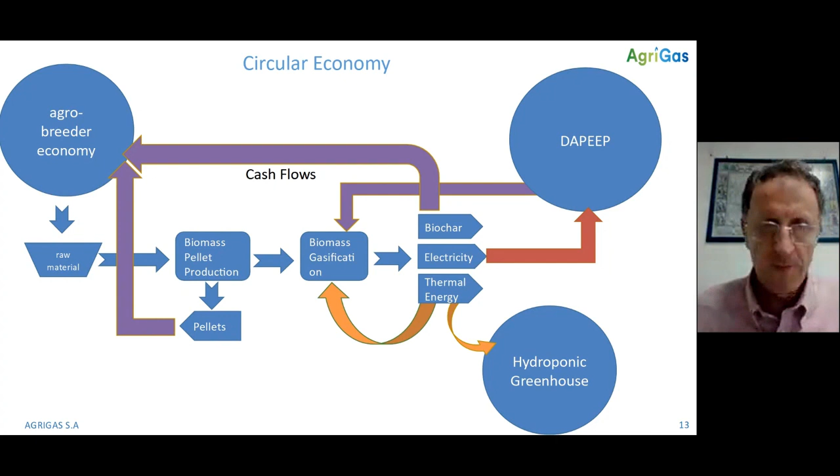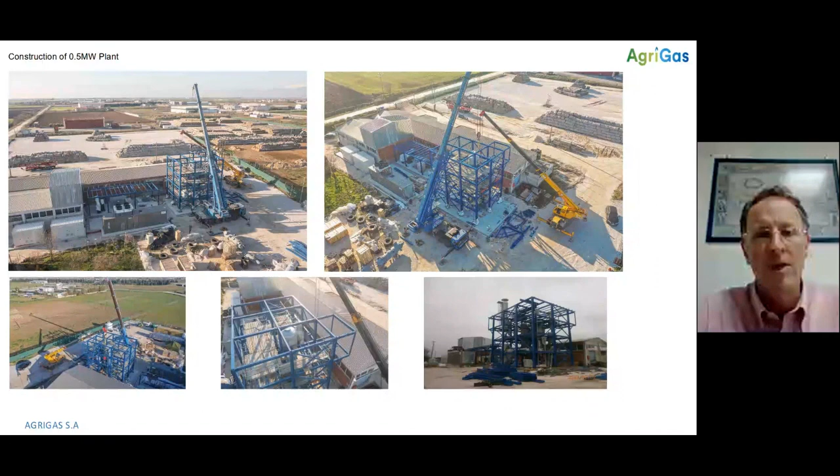Some pictures of the installation, pre-construction and during construction. We are stepping up this time, and we are ready in about 20 days to start operation. You see the facilities from above - it's in the final stage. In these pictures you can see the gasification tower and the auxiliary equipment.

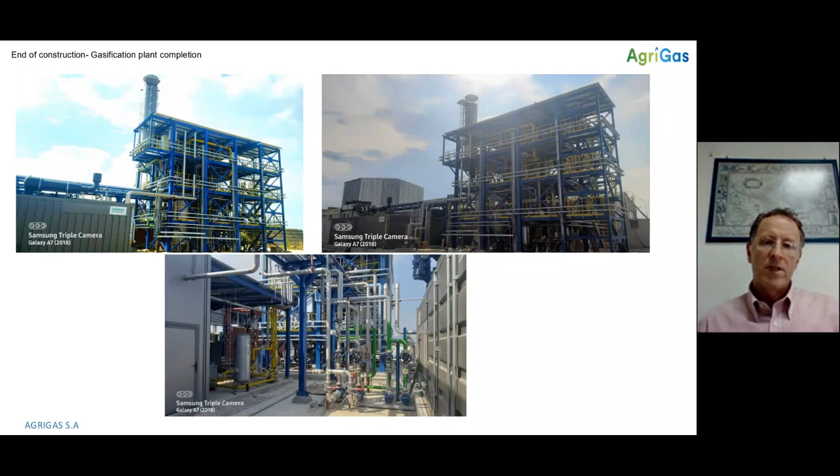Thank you for your attention. I'm at your disposal for any questions.

Thank you very much, Mr. Gekas, for sharing with us your expertise in this way. Your facilities are very inspiring, and we hope we can visit in the future. And thank you very much for being here. You're welcome, you're welcome, thank you very much.

So we are about 20 minutes late, but that was the last presentation of our webinar. Let's make a quick wrap up. The webinar was about solid biofuel production and circular economy. We have heard about the various types of solid biofuel and their main properties. We learned about the significance of certified schemes and how important it is in order to expand the production of biofuel. We delved deeper into the exploitation of biomass waste streams and heard successful examples that already exist in Greece - two companies, Klimis and Agrigas, that process and standardize the residual biomass and produce products.